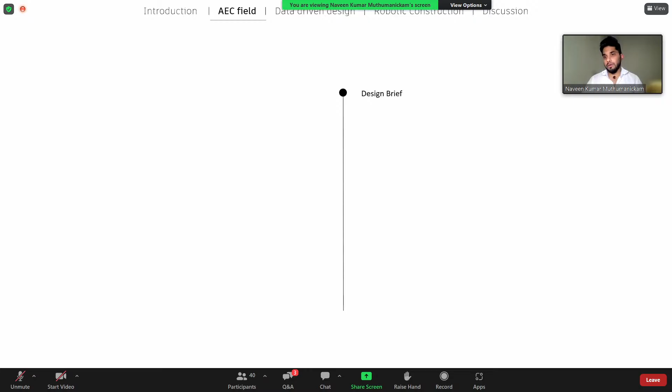So typically when we start a design, whenever we do a building design, whether it be academically in college or even for clients in reality, you start with a design brief and then you do a conceptual design. அதுக்கப்புறம் அதை கொஞ்சம் மெருகேத்தி we'll do preliminary design. And then we also add all the technical stuff, make it much more detailed, and we go into the detailed design phase.

And then we go into construction management phase. Once we decide, okay, fine, this design is fixed, let's go and construct it on site. Then we engage all the construction managers, procure all the materials, and then construct it on site. And then finally, it's being constructed. And after construction, we operate the building. When I say operation, we are literally living inside the building. So there is an aspect of facility management, the facility being the building, and then we are managing the facility throughout its life cycle.

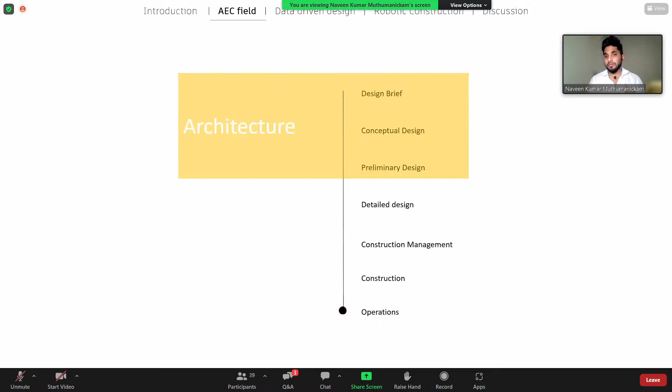So from the design brief all the way until operations, there are multiple professions involved. Typically architecture is heavily involved from design brief to preliminary design stage. And then we need the support of design engineers, let's say structural engineers or energy consultants, or estimators and contractors in order to detail out the design based on whatever is available in the market. And then we need construction managers and project managers support in order to execute the construction. So typically this is the spectrum of AEC activities, right? Architecture, engineering, and construction.

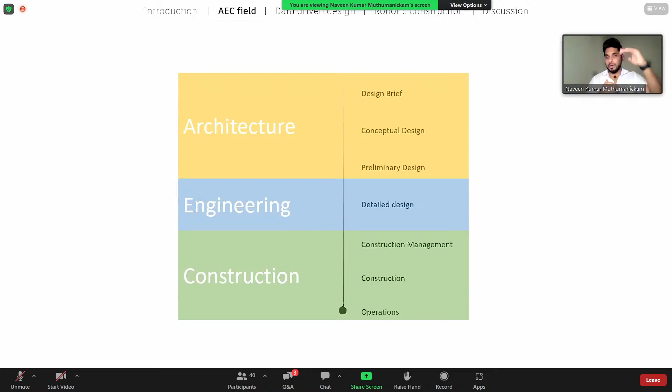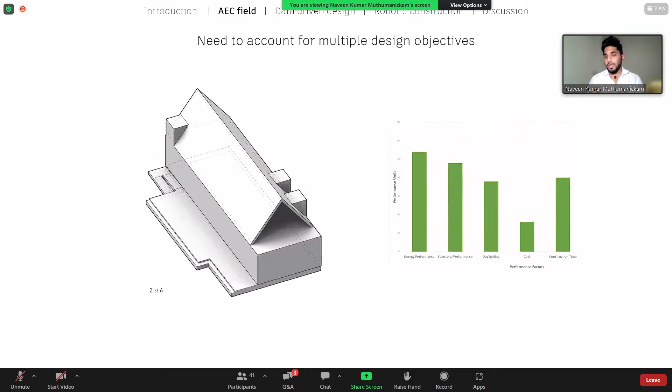So where exactly does data-driven design come into play here? Typically when we design a building, whether it be the architecture block at SRM University that you're sitting in at Ramapuram, whenever we design, we make a lot of iterations in the geometry. So whenever we make these changes, like staircase inge vekalama, illati roofing material eppadi vekalama, or should we orient the building in a different way, whenever we make such geometrical manipulations, something in the performance of the building is changing.

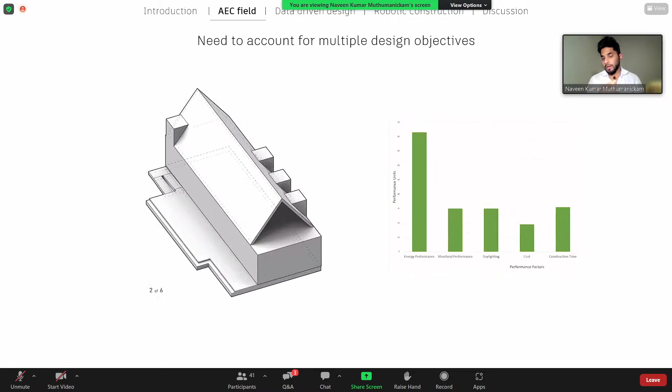So on the left side you see a GIF representing the changes in design. On the right side is a graph. I don't want to go into the technical details of the graph, but just imagine each of these bars: one is energy performance, one is structural performance of the building, one is daylighting performance, and then cost of the building construction, and then the time it takes to construct the building. So as you change your design, these parameters also vary accordingly. So how do we get a balance across these parameters despite the changes in the building?

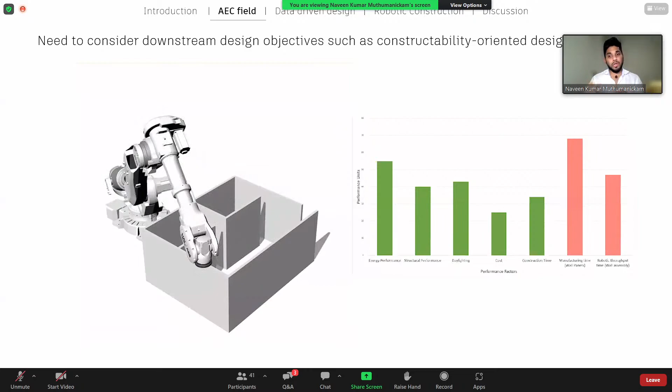But the moment you incorporate robotic construction into it, you also need to think about how long it will take for the robot to construct the building, or whether the robot will be able to construct the building, and things like that. So how do you measure that performance factor is also a matter of concern. So with varying performance factors, how do you design a building holistically?

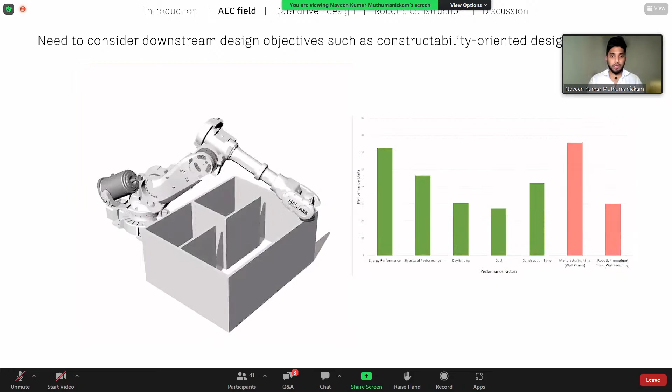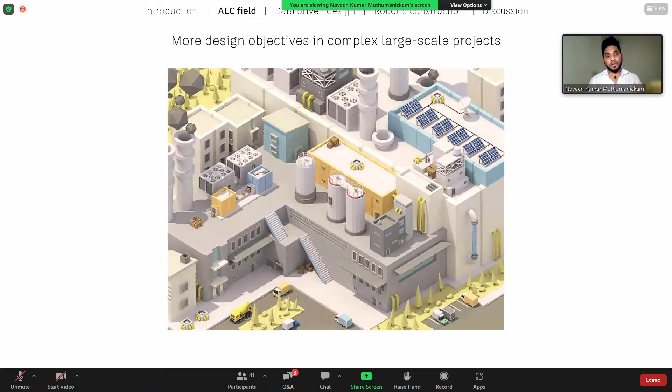So as I told, as the scale and complexity of the building increases, let's say you're designing a factory, or an industry, or a skyscraper, something which has so many different systems. A building is not a simple product, right? You have walls, foundations, ceilings, roof slab, coffer slab, and things like that. And you even have MEP conduits. So the complexity of the system also increases.

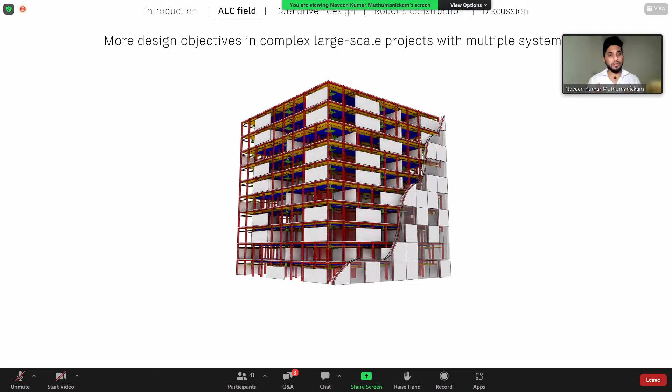Typically in a building, you'll encounter the facade, the envelope, the false ceiling, different MEP systems, structural systems, and so on. However much we might like to say that an architect is responsible for all of this, in large-scale projects, for example the Chennai metro rail construction, the Hilton Hotel, the airport buildings, there will be a lot of different stakeholders involved. It's not just the architects; it's architects, engineers, structural engineers, daylighting performance analysts, energy analysts, and so on.

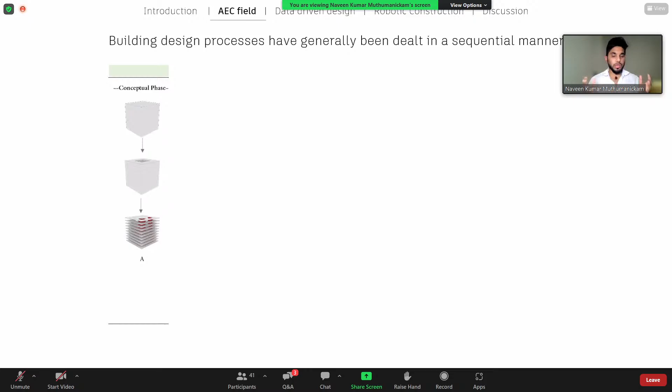So how do you make that holistic decision where all these parameters are satisfied, but there is one particular design? Typically, the process right now is that we start with the conceptual phase. We start with a massing model, and then we make some changes: we decide on the number of floors, the height of the building, the orientation of the building, and so on. Then in the preliminary phase, we might evaluate the building for, let's say, structural performance. The structural engineer might say, okay, I'll come up with 4 different options and evaluate for the best possible option.

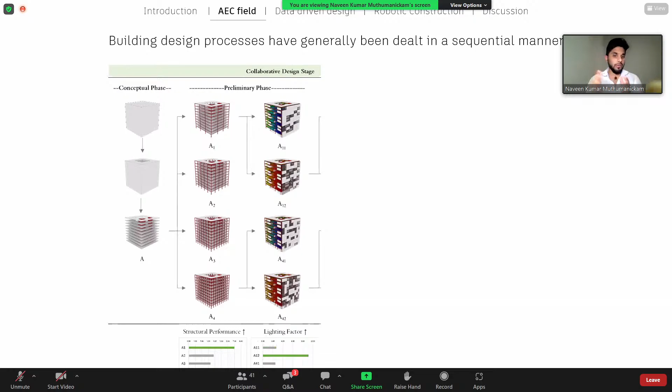When I use the word objective, what I mean is design goal. For the structural engineer, it's the most efficient option, the one with the highest structural performance. On the graph, A1 and A4 have more structural performance, indicated by green, right? So those designs go to the next phase. Let's assume an architect does lighting analysis, looking at the building design, envelope design, or how you position the windows. Their criterion is to maximize the lighting factor, indicated by the upward arrow next to the word lighting factor.

Whichever options have the higher lighting factor, they will push those 2 options to the next phase. Let's assume in the next phase you're evaluating the building for building cost, so it has to meet the budget. If they say the building must be completed within 50 lakh rupees, you will have to minimize the cost. It shouldn't exceed that 50 lakhs.

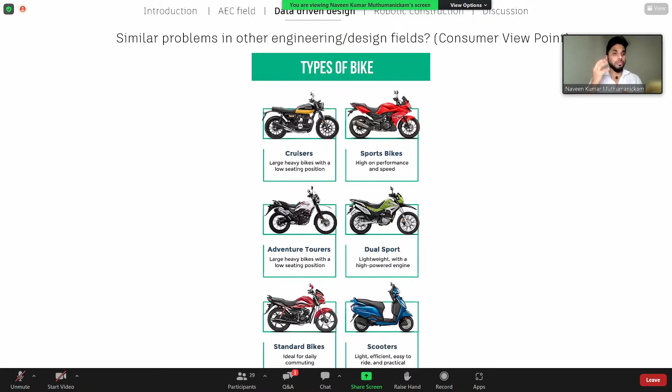But from a designer viewpoint, let's say Bajaj or KTM or Yamaha, when they manufacture, the factors that they take into account are, so they have to look at all these things. So the bike has to have ample amount of mileage, it has to be cost efficient.

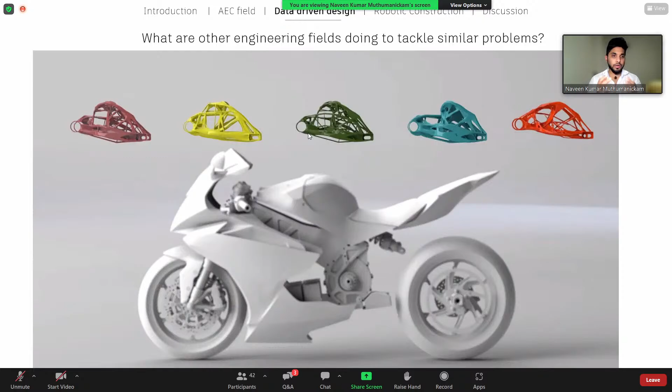So same way these engineering fields develop catalogs of design options. So for example, bike-la, if you can see my cursor, there is a suspension unit here. So this is a suspension unit, and then to design that suspension unit they use data-driven design. And what they essentially do is generate this catalog full of different types of bike chassis or suspension design, and then evaluate them for different performance factors.

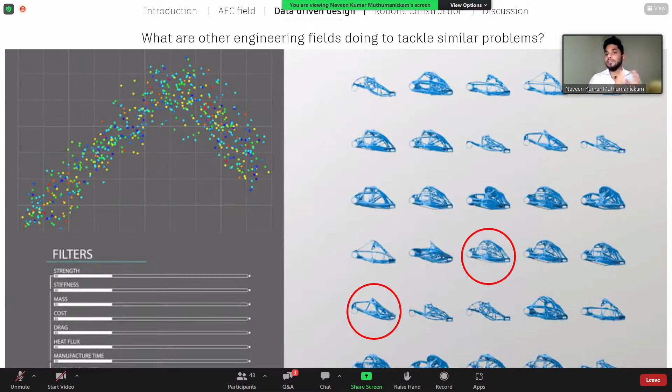So all of these different design options are generated. And then in the kutti graph mari theriyudhu, each point in there represents one design element in the catalog that you see on the right side. So each point, how it performs on multiple factors, they evaluate and select the best possible design which is fitting all these different parameters together. Okay. And this data-driven technique has been used in the design of cycles or other engineering products. It has even been used in the design of drones.

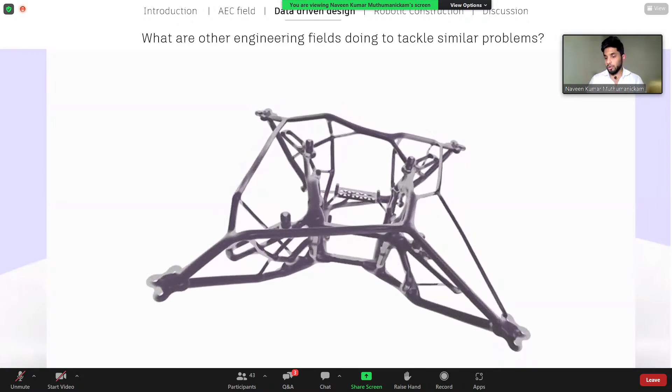So drone has to be lightweight to fly easier. At the same time, it has to be stable enough to carry heavy payloads. Like let's say நீங்க ஒரு DSLR கேமராவை மவுண்ட் பண்ணி அனுப்புறீங்கன்னா it needs to be able to withstand that weight. So how can you achieve both of these contrasting features? They use data-driven design so that they achieve the perfect geometry which can give the best of both worlds. It is lightweight as well as stable enough to carry ample load. So can the same principle be applied for building design? That was a key question that I tried to address through my PhD.

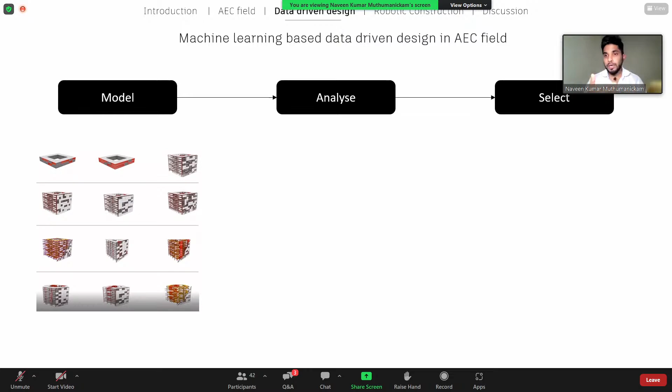And what I did was I developed a machine learning based data-driven design framework. That's a tool, it's a framework. Just giving a brief gist of what the framework is: it can generate multiple building design models automatically. And when I say automatically, it doesn't mean that the architect won't be modeling it. The architect will be able to guide the system to model in a particular way. So the designer aspect or the instinct is still there.

And then you analyze all these different generated designs for different parameters, like structural performance, daylighting performance, and build cost. This is a sample of the performance parameters. Project to project, it might differ. For example, a project might not be interested in daylighting performance. They might be interested in cost and structural performance alone. So, depending on the project, you can set what parameters you need.

And then once it's analyzed, once you make the selections, the system will be able to select the best possible building solution for the given design problem. And it's not like there is some computer software where I give all these things and then it does some magic and spits a design at me.

You need to step by step.

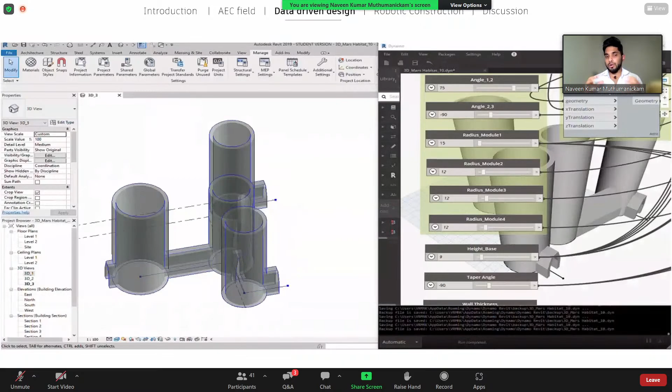It's an assistive tool rather than a replacement tool. So just a sample of how these things work, a small video sample. So this was a code, or a script rather, that I developed which will generate multiple design options based on different input parameters. You can change the way that the building is oriented, or the height of the building, or the shape of the building, the angle, and all the different systems which go into there.

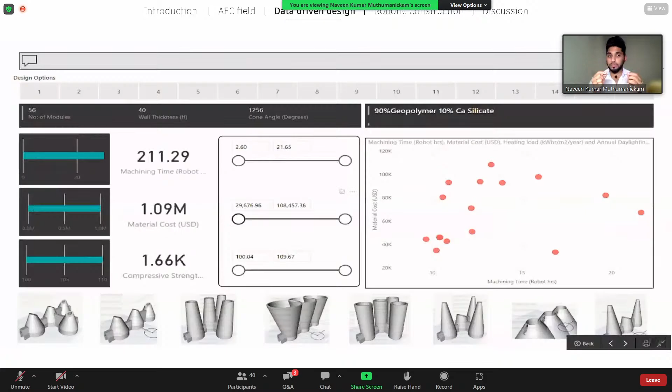And then once all these different design elements are created, they will all be stored in a catalog. And then on the catalog I have an interface where you can select, okay, here I'm comparing these designs for 3 parameters. One is machining time, which is basically how long it will take a robot to construct it. Material cost, basically how much cost will go into constructing this. And then compressive strength, which is basically a structural engineering parameter. So compressive strength should be maximum, machining time or robotic deposition time should be minimum. Construction cost should also be minimum.

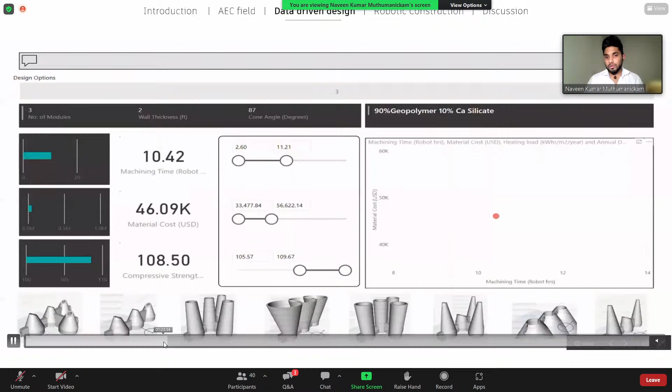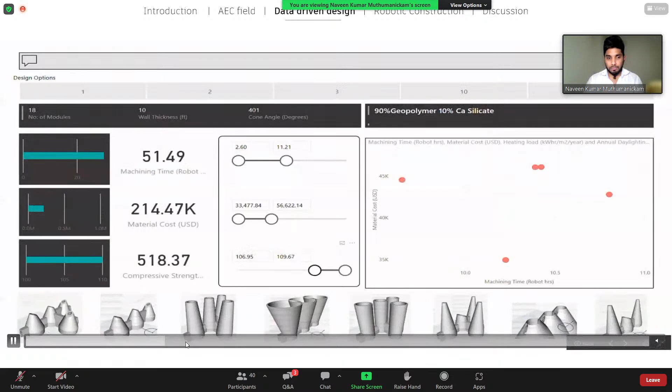So you make all these different filter changes, and with the filters you will see that the graph changes. Each point represents one design item. So it's saying that for the given filters, this is the best possible option, and that point corresponds to one. Okay. And another thing I developed while modeling: one important thing is that a lot of these different systems go into the building, right?

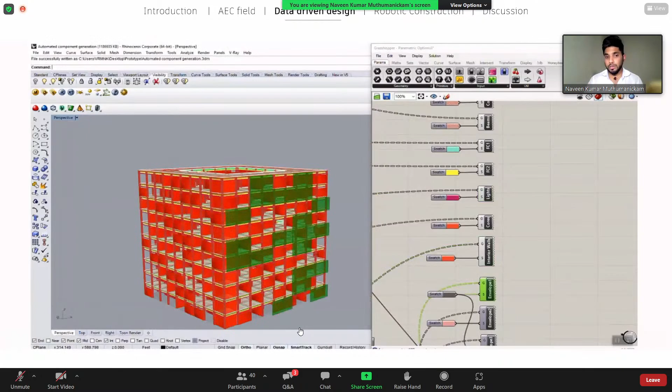So it will create placeholder elements for you. You just feed in an empty massing of a building, and then it will populate all the different floor slabs, columns, beams, false ceilings, and all the different systems which go into the building, the envelope assembly. So in our region, walls are typically made of concrete, right? It's flush concrete, it's homogeneous concrete.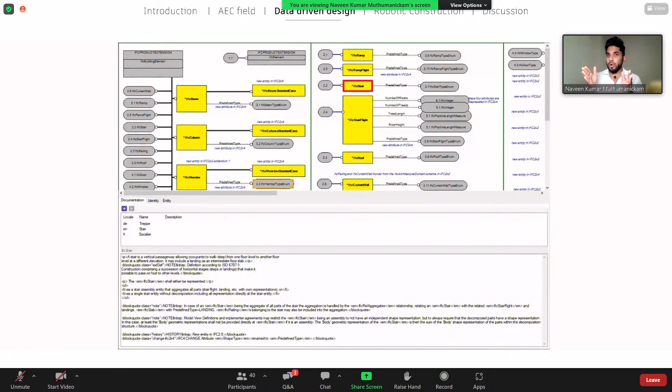But if you go to, let's say, Kashmir or colder regions, there will be multiple layers inside the wall, and that is for a reason: to insulate so that it isn't cold inside, there will be multiple layers. So the way that you construct the construction details, everything changes. So for that this technique will be helpful, where it automatically generates all these different components for you given an empty massing.

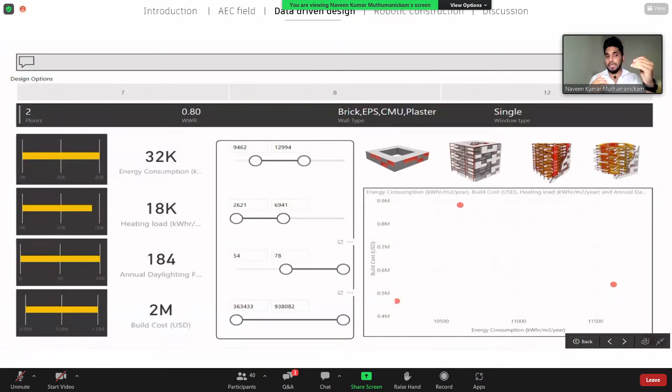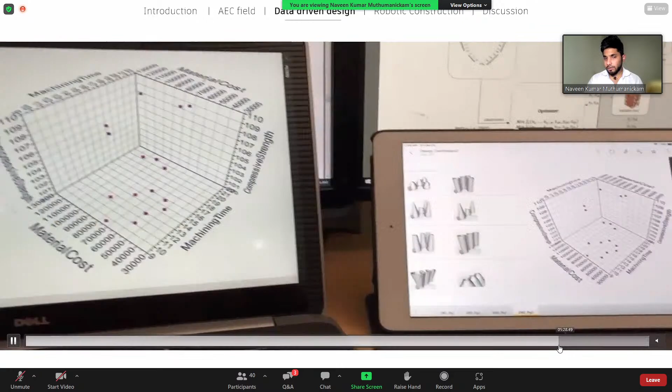So this was the framework, the data-driven framework which came out of my PhD. It can be accessed from multiple devices. So this is what came out of my PhD. And now that I've given a brief background about data-driven design, I want to segue into robotic construction. We know that robotics is taking a lead in multiple fields right now. So how do robots find a place in construction? Just giving an example with the project.

So here I will talk more about the NASA competition that I was part of, where I used the same framework that I developed, but for designing a building specific to the rules of this competition. So NASA, around 2017 or 2018, I guess, hosted a competition called the 3D Printed Mars Habitat Challenge. It was a multi-year, multi-phase competition. It started at the end of 2017 or beginning of 2018 and went until 2020.

So there were multiple levels, and at each level there were teams which were shortlisted and progressed to the next level. Initially there were around 80 teams, and Penn State was one of them. We ended up being the finalists of the competition through multiple phases, and then we won second place.

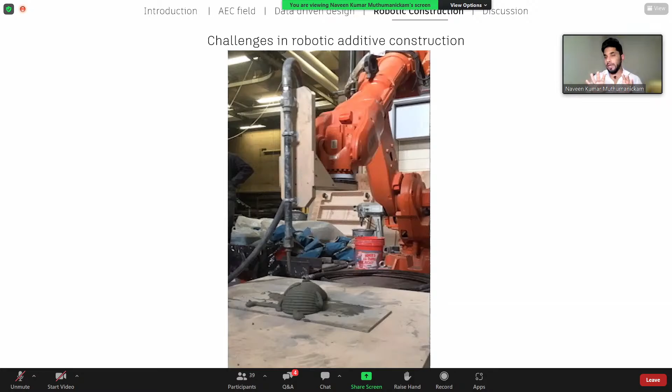So you need to think about all these things during the design phase itself, which is new to the construction industry. For example, architects, we don't think about construction up early. We might think in a very vague term, but we don't think in terms of detail. But we need to do that. So how do other industries tackle such problems?

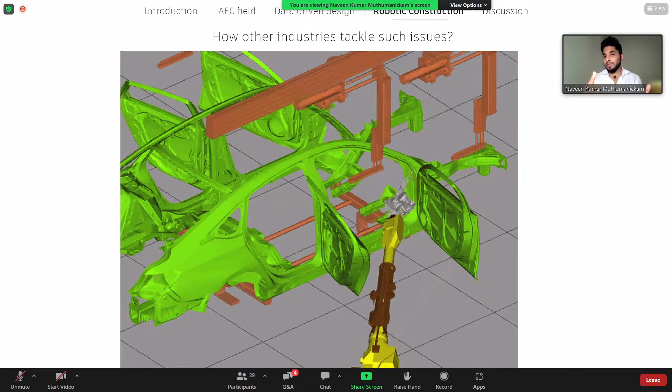For example, car manufacturing, they use a lot of robots. Automobile engineering, they use a lot of robots. So they use something called digital twins. So they basically simulate the robotic construction process even before anything is manufactured. So can this level of sophistication be applied to the construction sector? Yes, it can be. And that is what we did in the NASA competition.

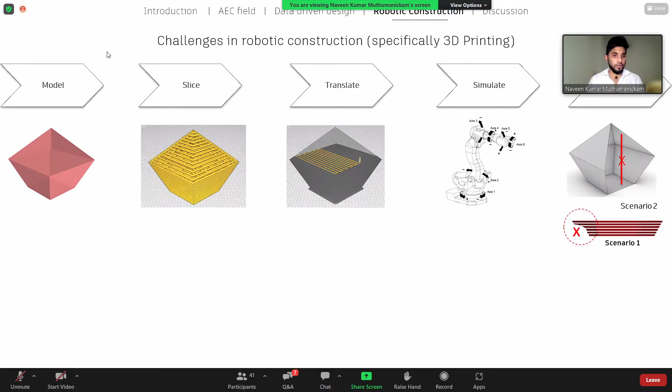So slanted areas might fail, which means you are limited to constructing straight walls. Or if your building is hollow, in most cases it is difficult to construct it using 3D printing. So how do you tackle all these issues? So in reality, let me give an example. Let's assume that we are 3D printing a slab, a rectangular slab. A small example. We slice it into two different toolpaths.

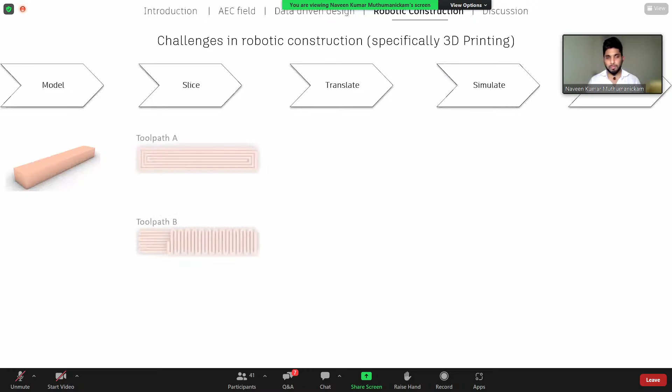So when I said route map, like Google Maps, the same rectangular slab or a beam can be constructed using both of these toolpaths. Toolpath A, which is like concentric, toolpath B, which is like zigzag, and different layers.

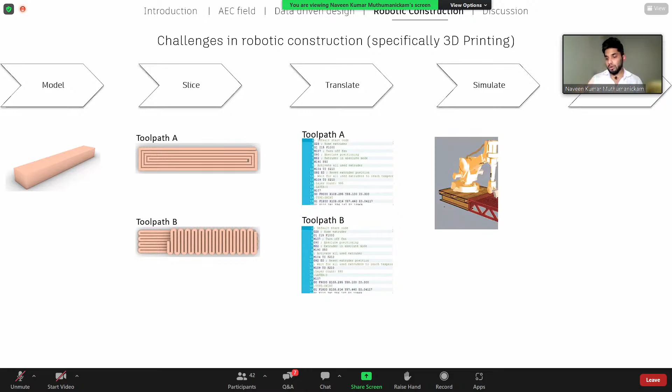And we have to... everything I'm seeing now is visual, my human brain can understand this, but in order to feed this to a computer, I need to convert it into a code, which is basically what I call toolpath code. It automatically converts this geometry into a code. And then you feed it in the robot, and that is the command for the robot. And the robot will perform the same action accordingly.

So right now we printed both of these slabs, right? Rectangular slabs. But there are minor nuances that we should notice. One is toolpath B was good in structural performance when we actually measured compressive strength.

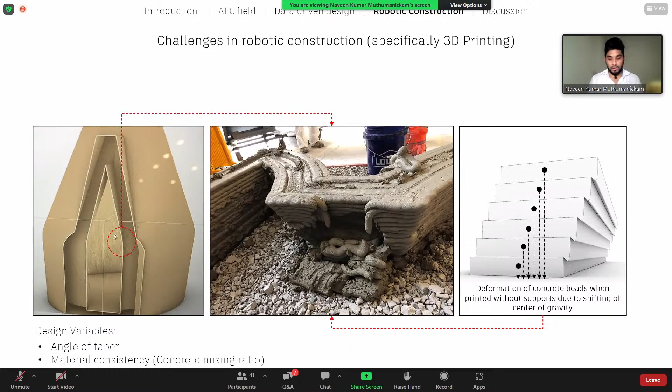It will be very monotonous, right? Like us as architects, we want design freedom. We want the building to look good. We want the building to have good aesthetic features, and for other reasons as well. So we can control the parameter, or we can change the material consistency. Magically, if we invent a concrete mix which sets instantaneously, then all the problem is solved. But unfortunately, we don't have such a concrete mix yet. So what else can be done?

So another problem is that, as you can see in this 3D printed sample here, in the corner wherever I'm hovering my cursor, there are lots of wiggly lines, right? So whenever the robot had to make such acute angles, same example that I told a couple of moments before, when you drive a car or a bike and make a sharp turn, you tend to swerve. So the same thing happens here. The concrete deforms because of the vibrations of the robot.

But such types of deformations are not so good, right? You don't want such unforeseen changes in the geometry. So how can you change that? So the challenge is over extrusion at edges and corners which are sharp, and the design variables that you can, when

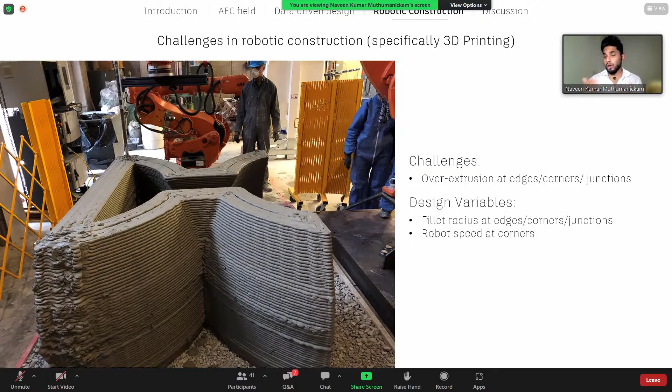These are some pictures from the finals itself. We eventually reached the finals of the competition. There were 80-plus teams, and 4 teams were selected for the final; Penn State was one among them. When we actually 3D printed a full-scale building of what we designed, we faced a lot of problems in the finals as well.

For example, with the concrete beads here, you can see that it failed on the innermost surface where it had that angle of taper. And sharp edges in the building had deformations, and similar issues.

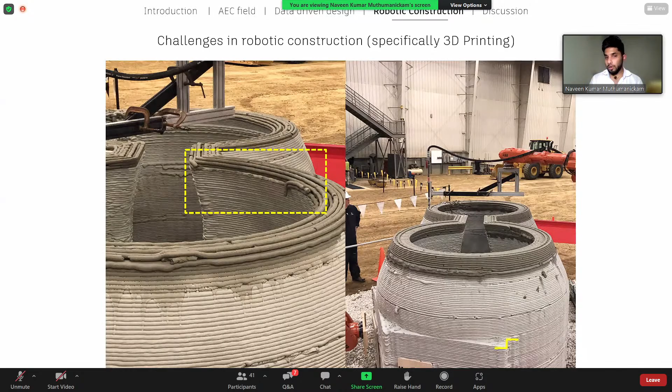So how did we manage all these things? It's very challenging because you need to consider multiple systems. What do you need to consider? You need to design the building itself, which means it's not just the concrete walls. You have energy systems, furniture, other things which go into the building, window positions, wall positions, and all those things. That is the systems design.

You need to design the tool path. As I told, on a simple rectangular slab it can be concentric or zigzag format. But when it comes to a whole building, which is a much more complex geometry, there are multiple ways you can design these tool paths. And you also need to design the material. If you look into concrete mixtures, there are admixtures, binders, aggregates.

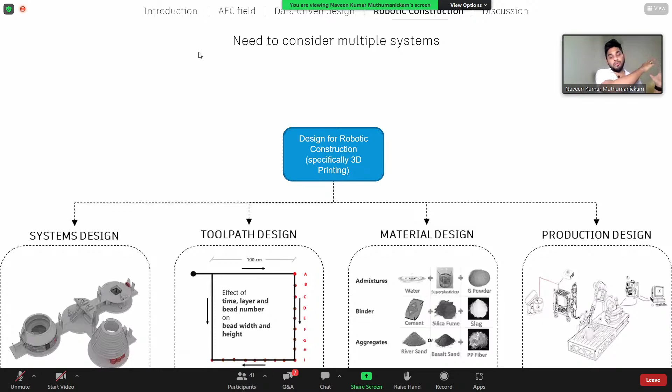All these things have to be designed simultaneously, which typically doesn't happen in the construction industry. When we design typical residential or commercial buildings using traditional design, we don't think about all these things at one go. We think about them at separate instances, but in robotic construction, all of this needs to be clubbed and thought about from the start of the design phase. So how do we do that?

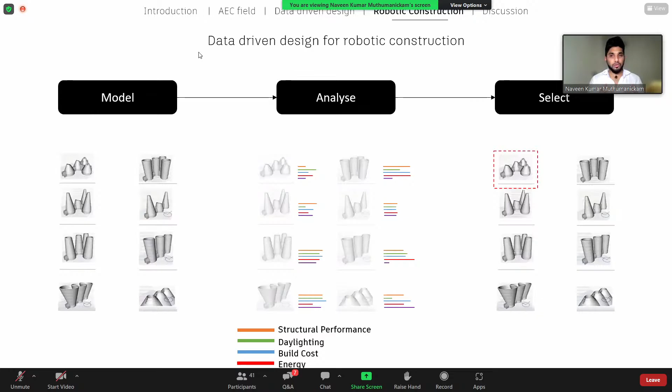I used the framework to generate a lot of different models, analyze them for different performance factors like structural performance, daylighting, build cost, energy, and robotic construction time, and then select whichever was the best on all these performance factors. This was my teeny tiny role in the NASA competition. Going into the details, we modeled the building. I developed a script which can take care of the entire modeling.

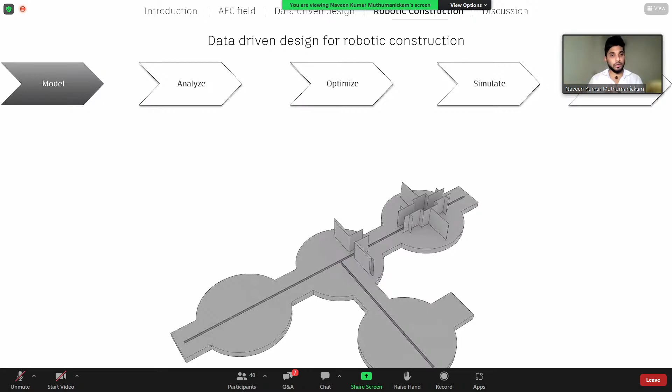So instead of showing the actual script, I'll tell what all were the components. So we had the floor slab with the trenches for all the different services. We had walls, partition walls, because it was an extraterrestrial building, or at least envisioned to be constructed in extraterrestrial environments, we went with a modular approach.

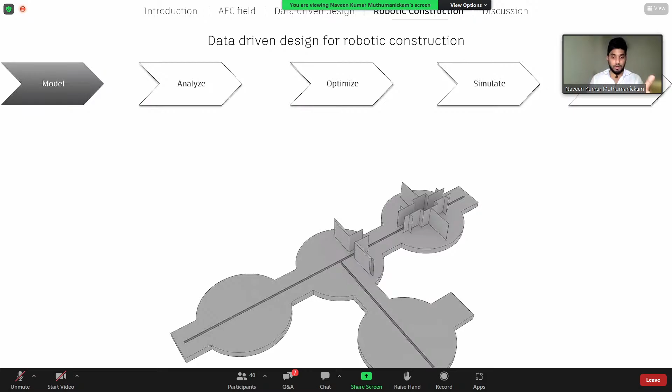And even in future, if you want to construct additional modules, if you construct it as modules, it will be easier. So we went in with a modular approach. That is why you see these different circles. So finally, we ended up with a 4-module version, which had all these different amenities like bedrooms, living quarters,

dining space, working space, and then we had an upper floor which had a floor slab and a working space, a gym space around there, and then we had separators between each of these modules which are electronically controlled. We had the mechanical, electrical, plumbing systems.

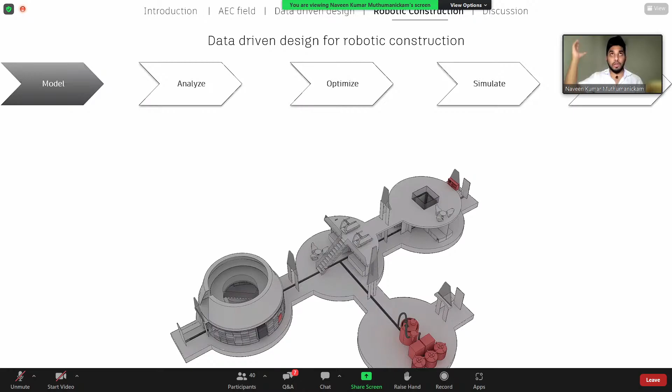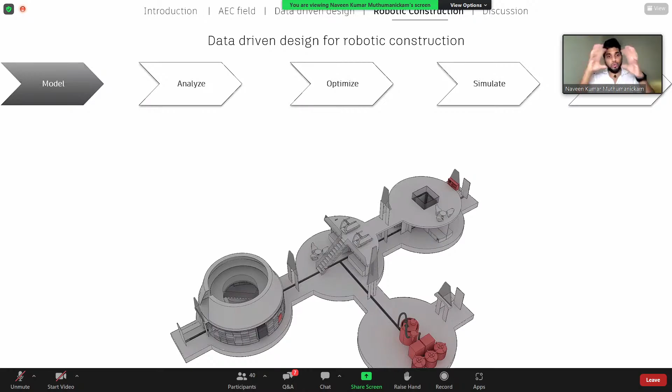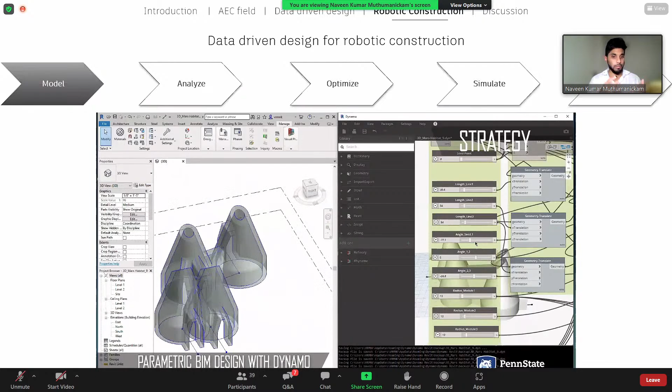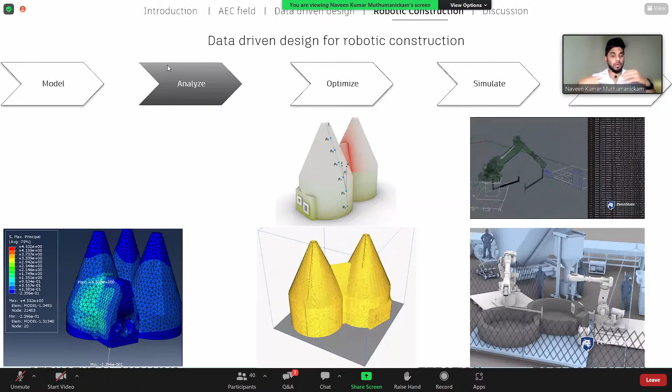So we compared it for multiple factors like total usable area ஜாஸ்தியா இருக்கணும், robotic deposition time கம்மியா இருக்கணும், stress concentration factor கம்மியா இருக்கணும். ஸோ இது எல்லாத்தையும் எப்படி பண்ணணும். 713 ஆப்ஷன்ஸ்ல இருந்து கடைசியா 5 ஆப்ஷனுக்கு கொண்டாந்து நிப்பாட்டணும் through the detailed design stage, and that was possible through the data-driven framework that we developed.

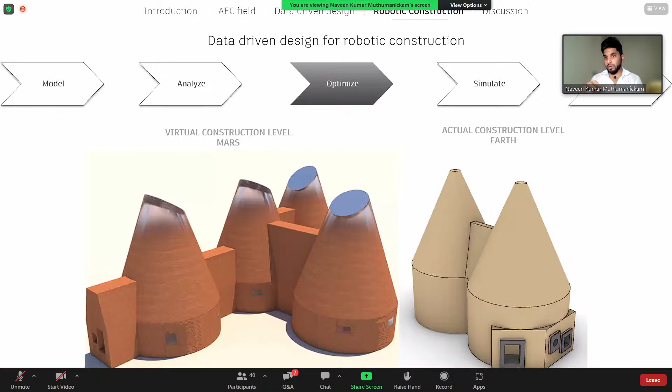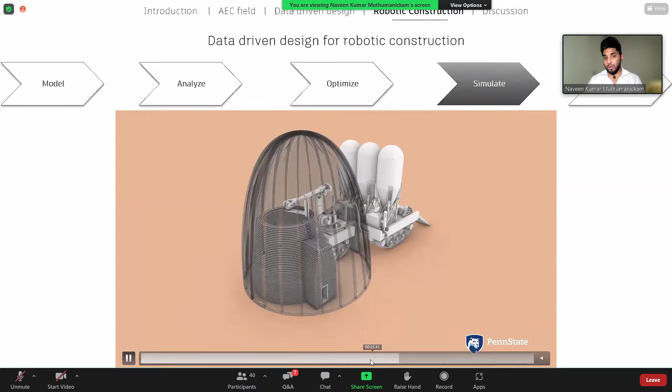And finally, these two were the design options which were selected. For the virtual construction level, we ended up with a 4-module version. For the actual construction level where we demonstrated this, we ended up with a 2-module version. And we did some simulations: if it were to happen on Mars, on the robotic system, how will it construct it? Right from excavation to 3D printing all the walls, and how it places all the other elements like the trenches, the duct surfaces, the windows, and all those things.

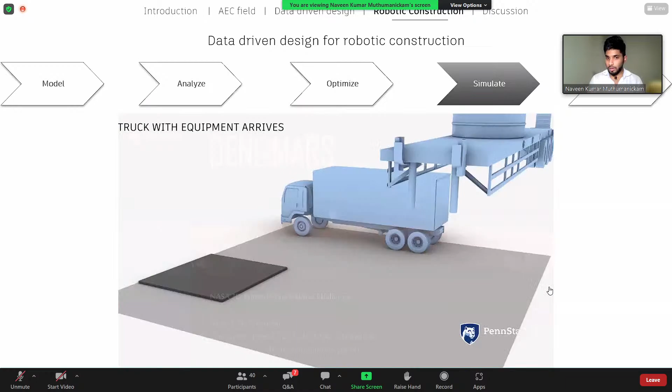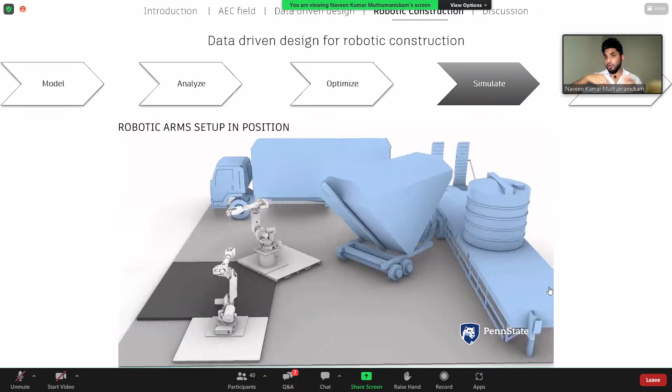So down here on Earth during the finals of the competition, we had to demonstrate it live. So adukku we developed another simulation which exactly created a digital twin of our production setup. We had a truckload of equipment delivered. We had a huge tank for water to mix the concrete, a Sintex tank mari imagine panikonga. We had a silo, this triangular thing, which consists of the powdered concrete. ஒரு பெரிய கண்டெய்னர்னு வச்சுக்கோங்க. And then we had a pump which will mix the water and the concrete mix. And then we had two robots, one robot which can 3D print.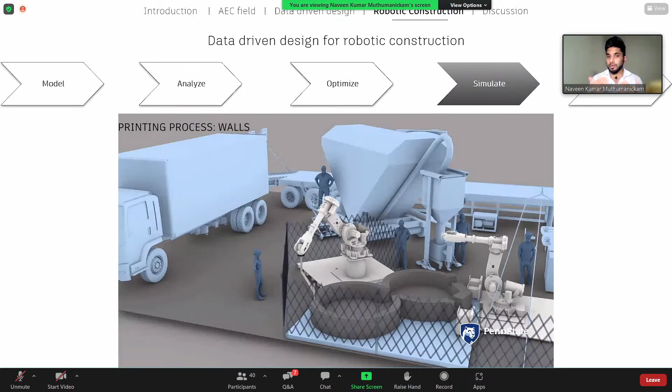As you can see, the hose connector is in the robot, so the robot will guide the hose according to the shape of the geometry. And we had another robot responsible for picking and placing objects like windows, ducts and services. We even simulated who will be responsible for what, like laborers; us teammates were the laborers here. So yaar endha idukku monitor pandradhukku responsible, that level was simulated.

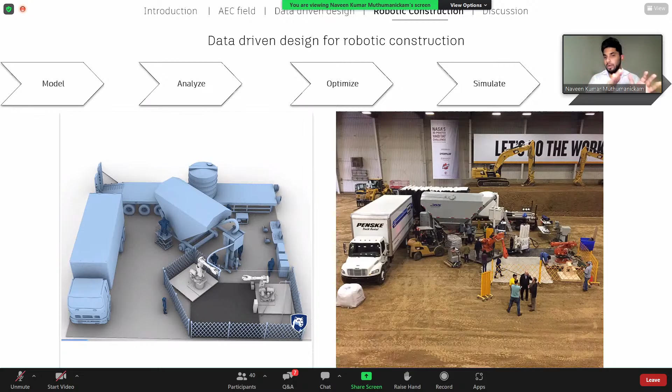Once we did this 4D simulation, this is the actual simulation, and this is the actual setup towards the right side. Left and right compare panni paakumbodhu, it's almost 95 to 98% similar. I wouldn't call it 100% because we had minor variations on site because of site constraints, but more than 95% அதே மாதிரி simulate பண்ணது என்னமோ அதையே நாங்க செட்டப் பண்ண முடிஞ்சது. These are a few snippets from the competition where this huge industrial robotic arm is 3D printing our entire building, the 2-module version. For sense of scale, there are human beings around it. It was almost a 4-meter tall structure, not a teeny tiny structure.

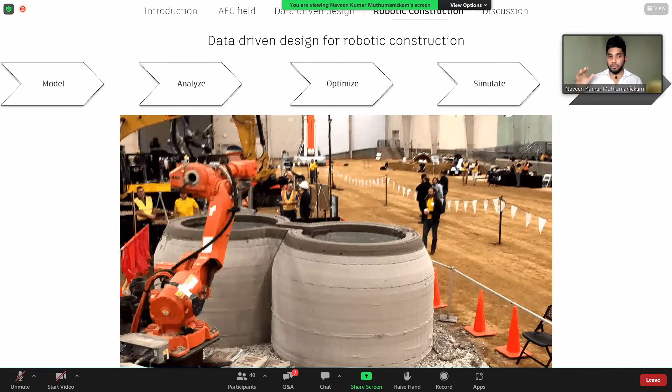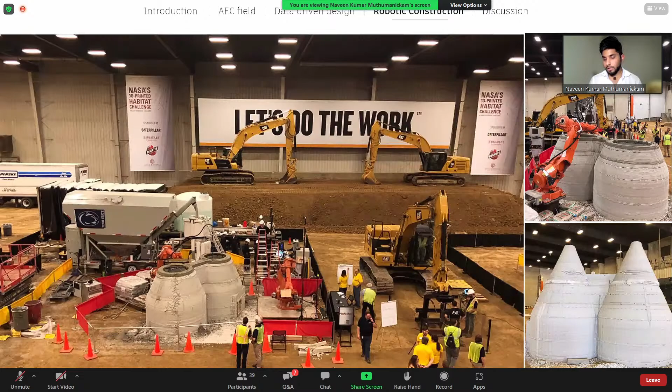And these are a few pictures from the NASA competition finals, in which we eventually won second place. I would like to put a small disclaimer here. I might be wrong, but to our knowledge, even in IIT Madras, you might have seen 3D printing of buildings, but there is a very minute nuance here. Most of the buildings that are 3D printed in Dubai, IIT Madras, or anywhere else in the world, even the USA or Europe, are straight walls. If they want to print a cuboidal room, they print it in different kit of parts, allow it to cure, and then assemble it together. Roof தனியா print பண்ணி they lift it using a crane and place it on top.

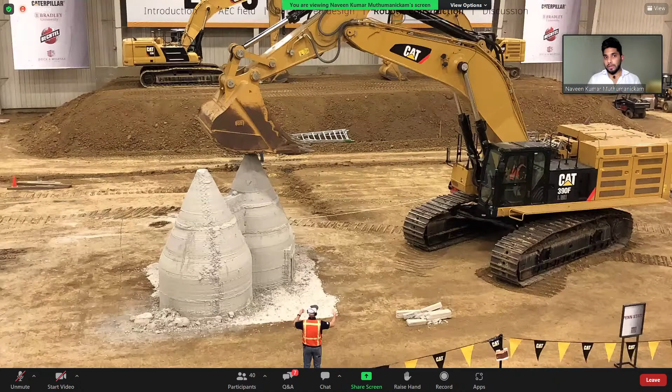Ours was the world's first fully enclosed tapered concrete structure, 3D printed without any support structures. We didn't have any internal support structures to support the taper. To our knowledge, I might be wrong again, it was the world's first fully enclosed tapered concrete structure. That is how it is different from other 3D printed concrete structures; it allows that taper and different geometries. And again, for a sense of scale, NASA being a very huge organization, they had to do all these different tests for structural performance.

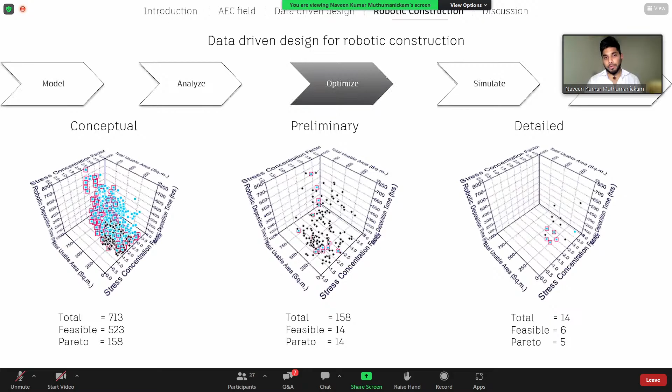Some of the creative limitations in designing a 3D building, given how 3D printing is being widely used in architecture. Yeah, I would like to point back to the same slide that I showed before. So a few of the creative limitations right now is that most of the 3D printing companies and startups that you see in India or in Dubai or in any foreign country, including the US here, most of them are straight walls. As I told, for the roof print, they don't print it all the way with a single robot. They print it on the floor separately, allow it to cure, pick it up and place it.

And organic shapes are not very possible. You might have seen wiggly walls which are 3D printed, but if you notice it very keenly, they don't have taper, or they can't have anything which is cantilevered as of now. Reinforcing 3D printed structures is also very manual right now. It's not robotic. Typically what they do is they print cavity walls, leave a gap in between, put reinforcement bars in between and fill to hold it together. So that is the way reinforcement is done in 3D printing, which again has some geometrical constraints. So you can't print very organic or designer friendly shapes using 3D printing as of now in construction, but it's slowly getting there.

And regarding whether 3D printing is being widely used in architecture right now, the global percentage of the 3D printing market, I might call it 5%. So it's still very meager, but it's slowly increasing the market share. Once we solve these questions of how to print multi-story buildings or tapered walls in a much more universal fashion, then this 5% has the prospects to increase to, let's say, 25% or 30% of the construction industry.